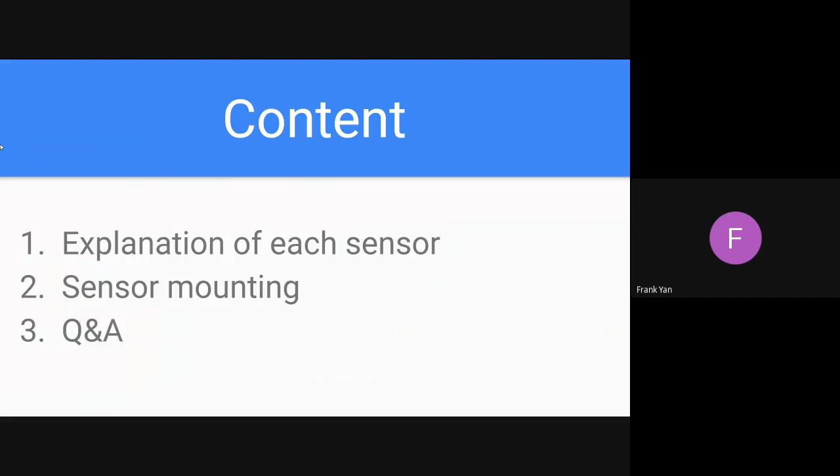Here's a high-level overview of the sensors we have for our autonomous vehicle. At the very front of our car, we have two radars, mounted on the front bumper, as you can see in the side view and front view. Near the roof of the car, we have 3 cameras in total. The middle one is a special camera that uses a fisheye lens, while the other 2 cameras use regular lenses for performance things such as object classification.

Finally, the sensor in the middle of the roof is the LiDAR. From the front and side views, you can see the LiDAR is mounted a bit higher than the other sensors, including the cameras. Arhindu will talk more about why we have the LiDAR higher, but this is the high-level overview of our sensor configuration.

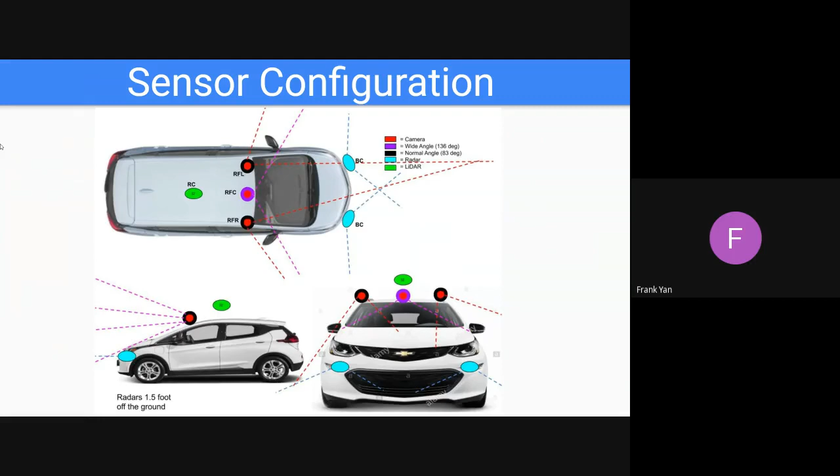So let's start out with the first sensor, the LiDAR. What is a LiDAR exactly? It's known as light detection and ranging. It's essentially a remote sensing method that uses light in the form of pulsed lasers to measure ranges to the Earth.

The LiDAR has terrestrial, airborne, and mobile applications. How the LiDAR actually works is that inside the LiDAR there's a rotating mirror where the light beam will bounce off of. Once that light beam hits that rotating mirror, that pulse is going to bounce off surrounding objects and return to the sensor. That sensor is then going to use the time it takes for each pulse to return to calculate the distance it travels.

Another way that the LiDAR can be commonly configured is that you just have everything rotate inside the LiDAR. But for most cases, you generally will have a rotating mirror and you have a light beam that bounces off that rotating mirror, and you're able to collect information from your environment.

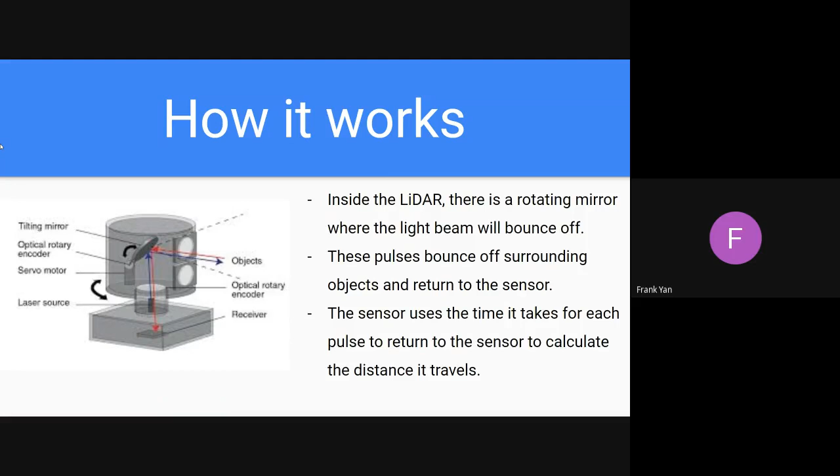The reason why we use a LiDAR is because it acts kind of like the eyes of our autonomous vehicle. As the LiDAR system is sending out millions and thousands of lasers every second, an onboard computer can record the laser's reflection point, and you're able to recreate a 3D representation of your environment as shown in the picture on the right. You can use this 3D representation to determine the vehicle's position with other surrounding objects.

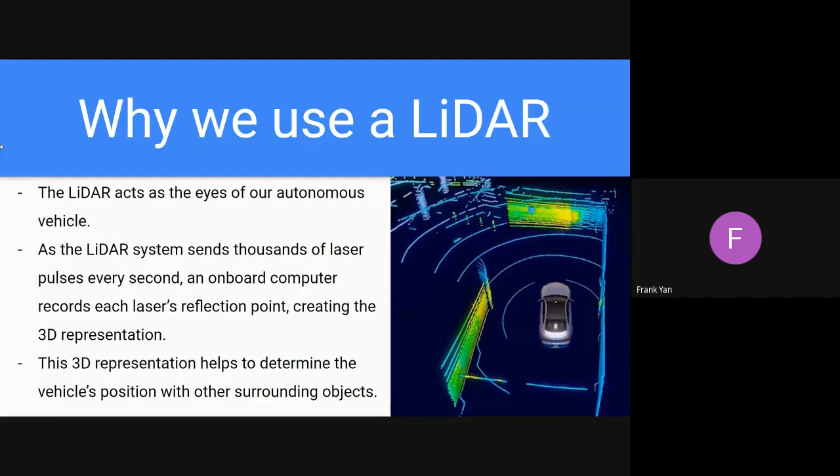So you're able to get a 3D environment, but you're also able to extract key information such as the length, height, width of certain objects. It really makes it easy to get a better sense of your object and the environments that your car is going to be in.

The specific model that we use for the LiDAR is the VLP-32C LiDAR. The reason why we chose this model is because it has a 360-degree field of view, and has the best vertical resolution compared to other LiDARs, and there's great power and temperature efficiency, which makes it easy to maintain. It also has a very high point cloud density, so it's able to contract all this information, and you're really able to get more accuracy from your point cloud.

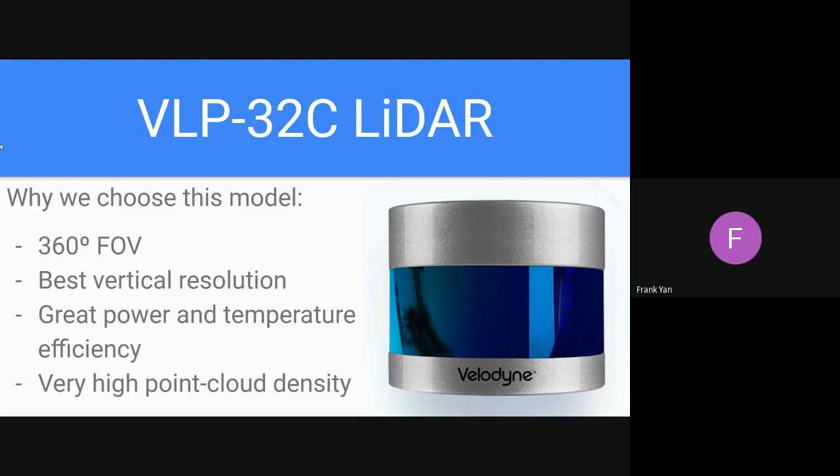So there are some pros and cons to the LiDAR. The pro is that data is going to be collected very quickly, and you're able to retain high accuracy with your data. This means you have a lot of high sample density within your data, and you're able to get key information such as the XYZ coordinates of a certain object and even more information from your environment.

It's also capable of collecting data from elevated surfaces and works in bright and dark environments. So if you're driving at night or going up a hill, the LiDAR is still able to retain this information rather well. The LiDAR also really helps in detecting weird objects, as there are no geometric distortions when it's collecting this information. Because it's a light beam, it's a lot easier to pick up on these weirdly shaped objects, and that's what really makes the LiDAR really powerful.

However, there are some cons for the LiDAR. It's very expensive - the model we discussed, the VLP-32C, costs around $10,000 Canadian. It's also very ineffective in heavy rain and low-hanging clouds. If you notice, a lot of these autonomous vehicles that you see in public are in California or really nice places with good weather, because the LiDAR is able to excel in those weather conditions. But if you take it to Canada, the LiDAR is not going to do so well with lots of snow and heavy rain.

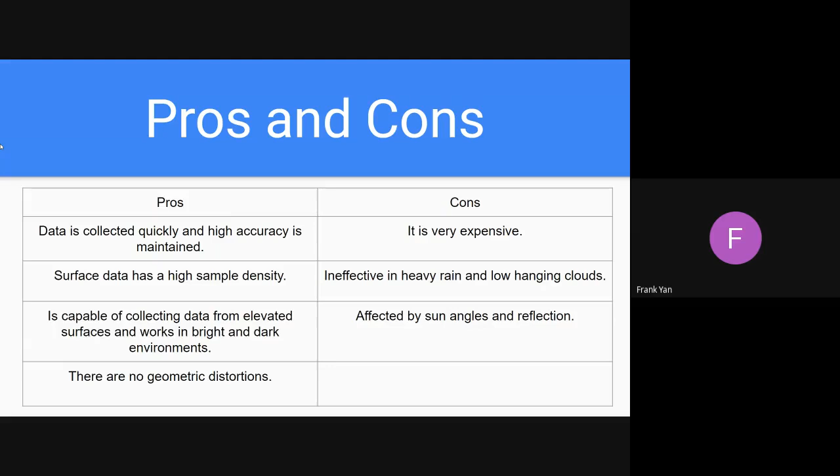The reason why that happens is because, one, it will get damaged by rain, snow, etc. And two, when you have light going with water, the water can refract that light, so you're not able to get 100% accuracy as you would in sunny conditions. And even though the LiDAR does work well in bright environments, it's still affected by sun angles and reflection. If you're going down a city and there's a large glass building on a sunny day, it's going to be harder for the LiDAR to extract that information, because if there are a lot of reflective surfaces, the light may not bounce back correctly or accurately. So it definitely does get affected by sun angles and reflection.

So the next sensor that we're going to cover is the radar, and I'll be handing this over to our radar driver manager, Gokul.

First we'll go over the high level principles of how a radar operates. Basically, it emits radio waves from a transmitter, and then it measures the echo off of objects of interest.

Based on that, we're able to derive useful information like the position and velocity of those objects. For example, to get the velocity from a radar, it's calculated by observing the change in frequency from when we emit those waves and when we read the reflected waves again.

So we could tell if an object is moving away if the waves have stretched, meaning the frequency has decreased, and if the object is moving towards us, the waves will have compressed, so the frequency has increased. This is known as the Doppler effect.

And in terms of position, we just use the time delay between transmission and receiving that reflection.

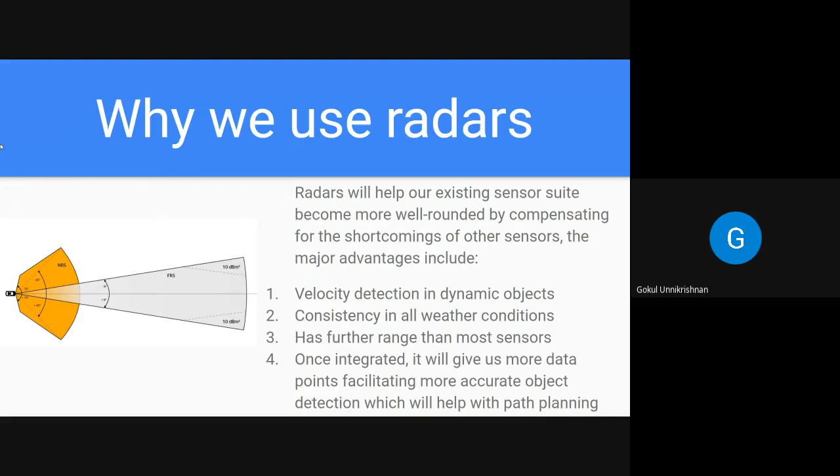So the model that we're using is called the ARS430 from Continental.

We chose this model because it has a long range from 0 to 250 meters, and it can perform a couple of types of scans, the near scan and the far scan.

The near scan has a field of view of plus minus 75 degrees and a distance of 70 meters. The far scan has a field of view of plus minus about 9 degrees, and it can measure up to 250 meters away.

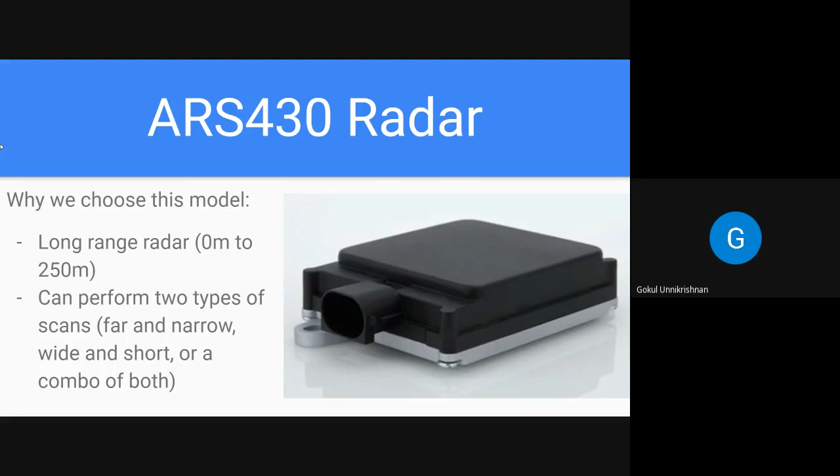The video on the left is the point cloud data that we display on the RViz module that I talked about earlier. In the bay, there's a table, we have two radars there, and people will just be walking across, and you see those detections in the video.

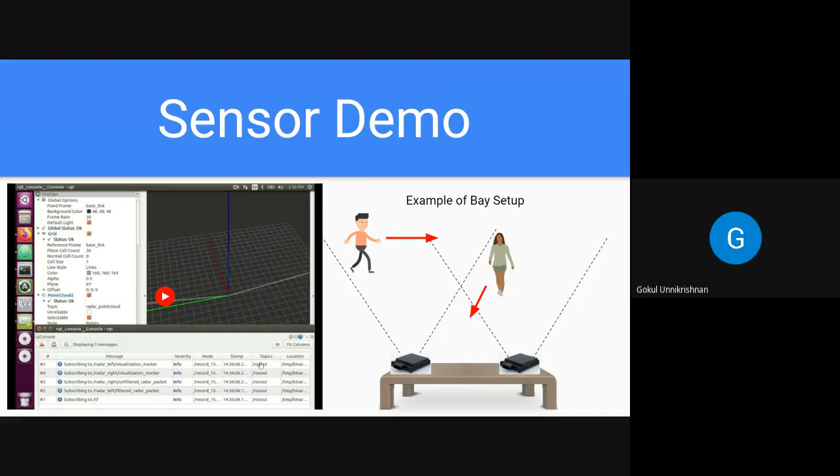We don't have to play the whole thing, but basically the green detections are from the left radar, and the blue one is from the right radar. There's info at the bottom, basically indicating that something was detected.

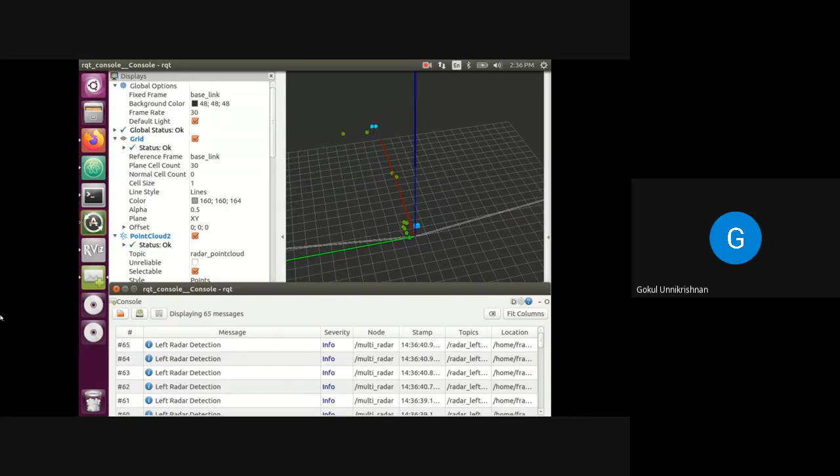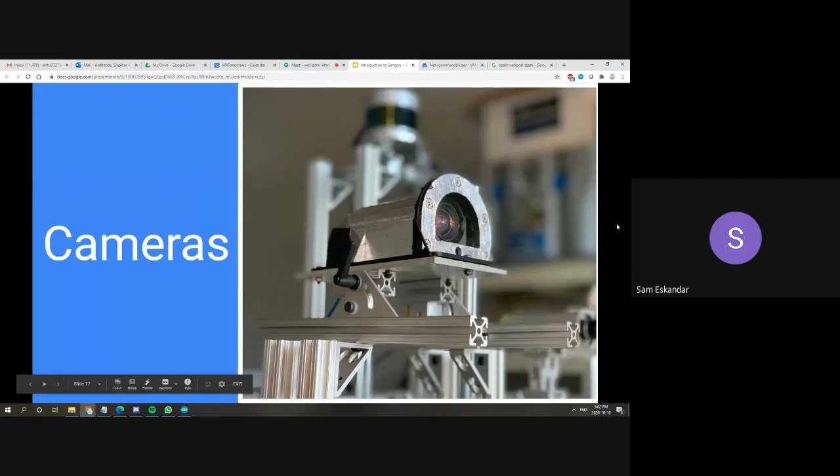All right, so it's time to learn about cameras. Okay, let's get into it.

Cameras in autonomous vehicles are used for capturing long-range, high-resolution information. It's literally just a camera taking pictures. Two parallel cameras can assist in developing a 3D mapping. Most of the time, cameras are used for capturing 2D information, such as lane markings or sign information. However, using multiple cameras can allow for a 3D model of an image that is detected. So just think of it as both your eyes working in tandem to give you something like depth perception, or show you the things in front of you.

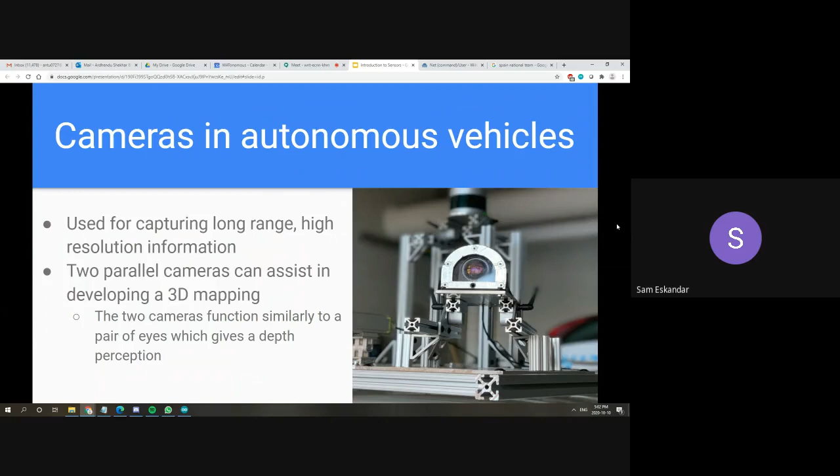So why do we use cameras? Other sensors can be limited in range, such as LiDARs and radars, and they will tell you your surrounding objects. However, cameras can tell you something coming from a far distance, like an upcoming traffic light or stop sign. 2D objects need to be captured. Lane markings and sign information are important, whether the lane marking is a yellow line or a white line, or the sign is yield or stop. These are important distinctions that we have to make. And then distinguishing different objects.

So looking now at the cameras we use, or some models that we use. One of the lenses here is the Fujinon DF6HA-1B lens. This lens has good stability. Cars are obviously moving objects, and just because the car is moving, we can't sacrifice the quality of the image, or else we won't be able to tell what we're actually taking a picture of. So this lens provides good stability when it comes to that, and has a resolution of 1.5 megapixels.

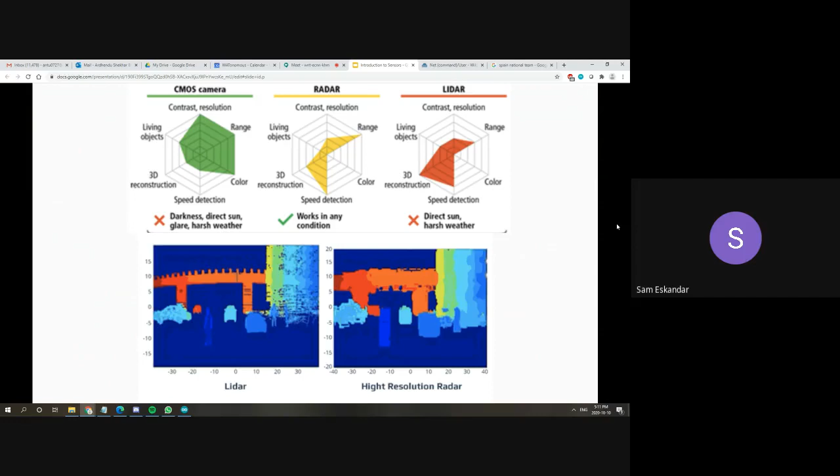Now IMUs, let's get into it. IMUs are inertial measurement units, used to track vehicle position and orientation. They come with a combination of different sensors within them — it's one sensor, but they have multiple inside: three main sensors, accelerometers, gyroscopes, and magnetometers.

Not all IMUs have magnetometers — if it's not essential, you could still have a true IMU without it. All a magnetometer does is add an extra 3 degrees of freedom. Every single one of these sensors provides 3 degrees of freedom, essentially X, Y, Z.

The accelerometer measures movement in the X, Y, and Z axes, telling you how fast you're ascending and descending and how fast you're going in general. The gyroscope tells you pitch, roll, and yaw — your orientation relative to the center of the Earth. Magnetometers measure your orientation to magnetic north on the X, Y, and Z axes, telling you which cardinal direction you're facing and which angle you're leaning. So that's 9 degrees of freedom total, each sensor providing 3.

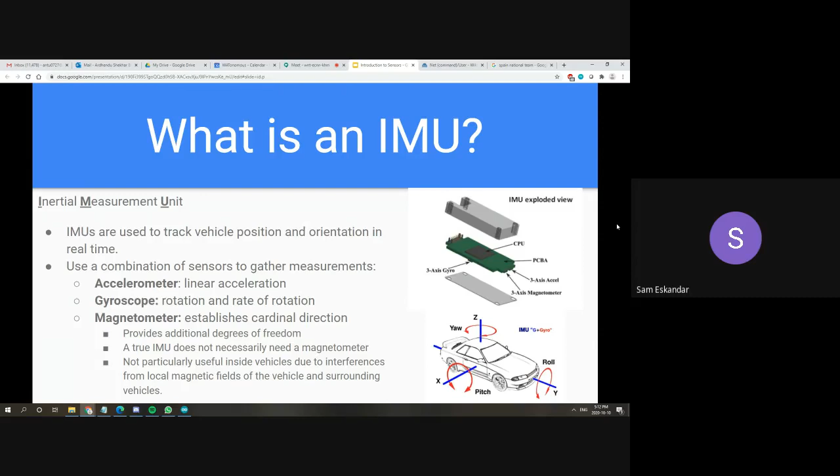As I was saying before, a typical IMU has one of each sensor per axis, which is why each one comes with 3 degrees of freedom. So generally they only have 6 degrees of freedom, and 9 if a magnetometer is added.

So they work by, the data reported by the IMU is fed into a processor, which determines the angular velocity by integrating to find angular position. Then based off the inertial reference frame, we take measurements and run them through an algorithm, some software we have.

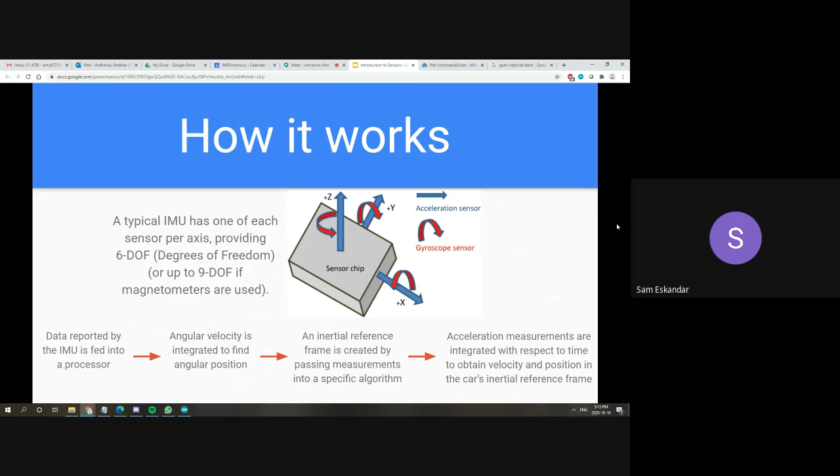And then the acceleration measurements are integrated with respect to time to obtain velocity and position in the car's inertial reference frame. This is how we determine things like how fast we're moving, or the position. So math is useful, look at that.

So why do we use an IMU? IMUs provide localization data, and they serve as a supplement to GPS positioning systems. This is actually useful for the Year 4 competition, applicable to autonomous driving, because one of the challenges is we're going under a tunnel.

How are we going to drive the car, or how are we going to direct the car? Because we don't have any GPS signal anymore, and that's where the IMU comes in.

IMUs work in tandem with multiple different sensors. They're not always just on their own, usually working with GPSs. The IMU we have, as well as the GPS, are both provided by Novatel, just for some background.

So this will be important coming to the next slide where we talk about some of the disadvantages IMUs come with.

IMUs tend to accumulate error because of dead reckoning. Dead reckoning is when small measurement errors that we take at the start, or at a point in time, will accumulate and lead to drift.

This is essentially like if you're doing a math problem and you're rounding at the very start, and then you get to the end and your answer is off by either a whole number or some decimal points, because you're rounding. Same concept here.

It's using previous measurements, although it's supposed to be provided in real time, and using those calculations skews the actual values. This can be corrected by having defined limits, where once we reach a certain point, we have to correct our errors.

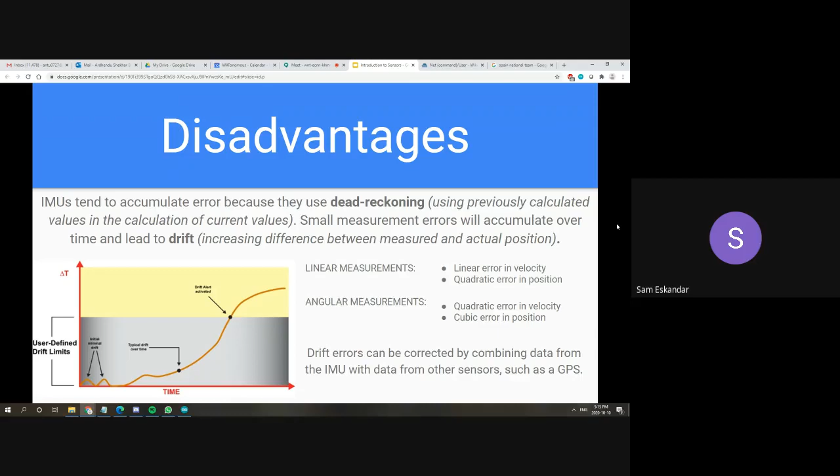So I'm going to start talking about the sensor mounting and the basic design methodology that we go through while mounting the sensors and actually designing enclosures for them.

So usually for any given sensor, our design scope can be divided into two broad categories: mounting and enclosure. The mounting deals with how the camera actually sits on the car's roof rack.

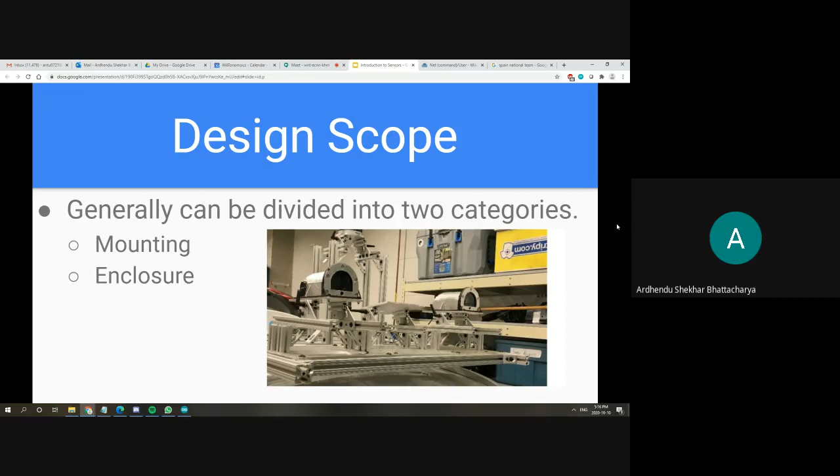So in design requirements for mounting, one of the main ones is stability, and a lot of it deals with vibration resistance. We want to make sure that when the car is traveling, the sensors don't vibrate and the mounting is as stable as possible.

Not only does instability induce a risk of the sensor quite literally falling off the car, but it also hinders the sensor's ability to take accurate measurements.

Furthermore, we also want the mounting design to be as simple as possible. So in the case that we want to unmount a sensor for some reason, we want the design to be as simple as possible so that can be done quickly without any hassle.

For the enclosure, we want it to be durable because we want it to be able to deal with the elements of nature. For example, in our case, since we're in Canada, a lot of it would be snow and rain.

It'd also be dust, and we want to make sure the enclosure can deal with it. Apart from that, it has to provide appropriate insulation. So even if it's durable, we need to make sure the enclosure actually does its job and doesn't let any of these elements of nature affect the actual sensor itself.

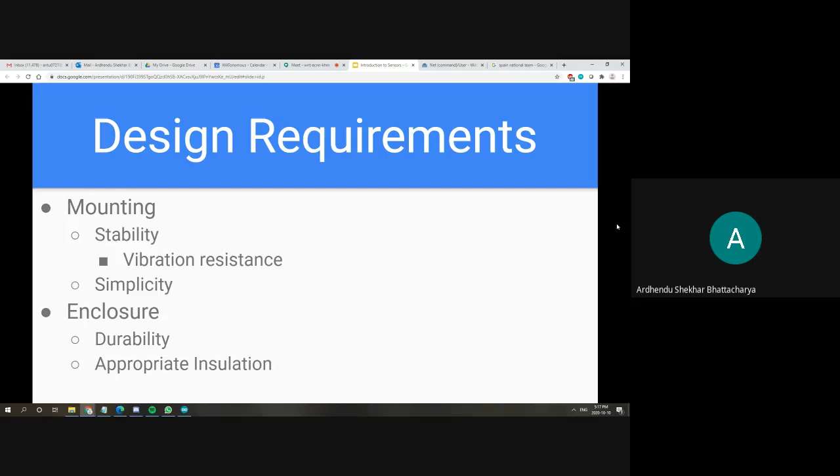So the design verification for the sensor mounting is done through various methods. The two most common ones are finite element analysis simulation and hand calculations. Usually these are done in conjunction. So we use hand calculations to see what we should expect and see what the design should behave like, and we use the simulation to actually verify that what we're expecting is what's going to happen.

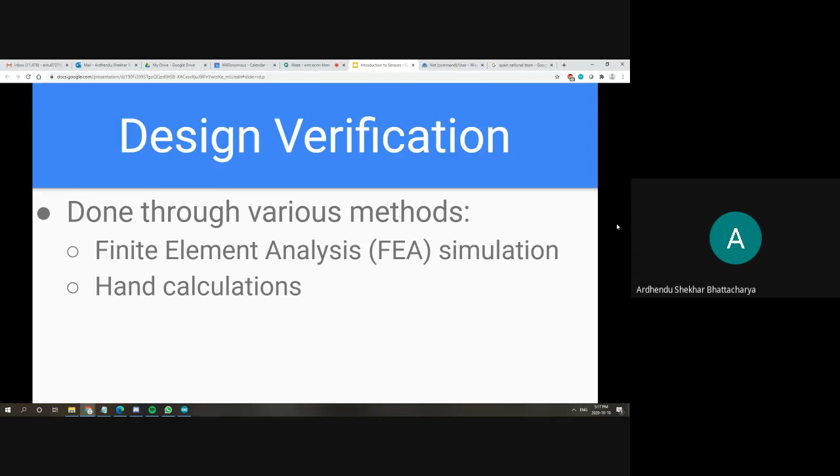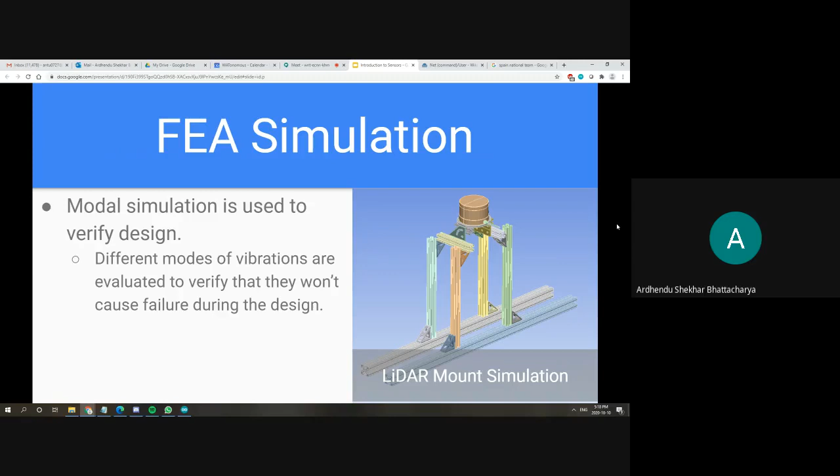So in modal simulation, there are four major steps. The first one being defining the materials. That's just taking all the parts and saying what material they are, because based on the material properties, they will have different degrees of susceptibility to different forces.

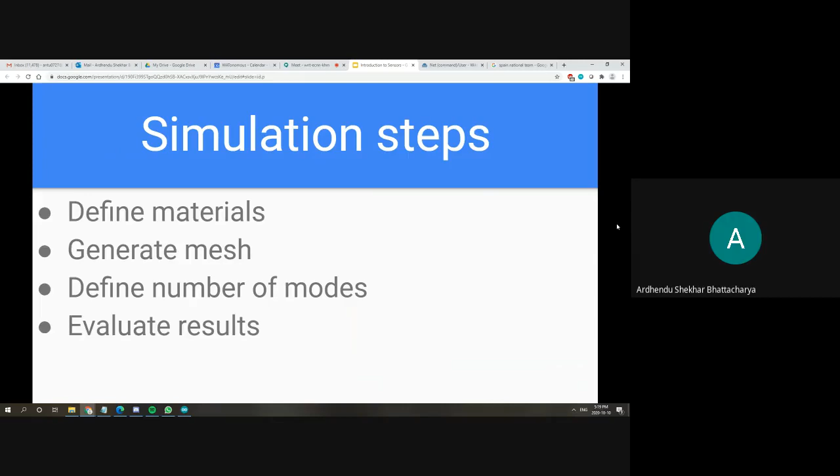The next step is to generate a mesh. So that's dividing the entire system into very small elements. The third step is defining the number of modes. That's a matter of just seeing how many different kinds of vibrations we want to evaluate for failure. And the last one is actually evaluating the results ourselves based on what the simulation spits out.

So mesh generation, as I mentioned before, is essentially done to divide the structure into very, very small pieces. What the simulation does is it analyzes each element on its own, and the final result is a superposition of all the finite elements that are generated by the mesh.

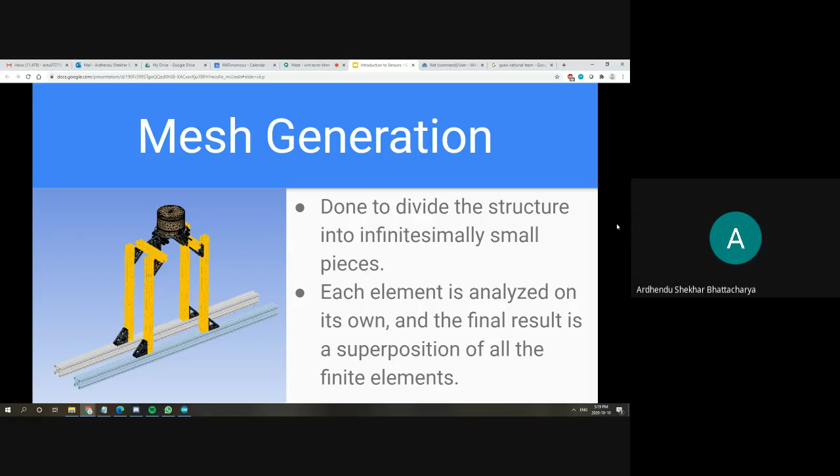So just to give a brief background on vibration modes, a mode of vibration is simply a unique manner of vibration that the system can experience. For example, one mode of vibration could be a beam going up and down, while another mode could be a beam going left and right. Each mode is caused by a unique combination of forces and conditions, and because of that, some modes are more probable than others. It's up to us to determine which modes are the most probable and to evaluate them accordingly.

Additionally, each mode has a natural frequency associated with it. The natural frequency is the frequency at which the vibration occurs for that mode. The entire goal is to make sure that our design avoids resonance at this frequency. What that means is the frequency that, for example, the car is traveling at should not be close to the natural frequency, because that's where resonance occurs and that's where failure is most probable.

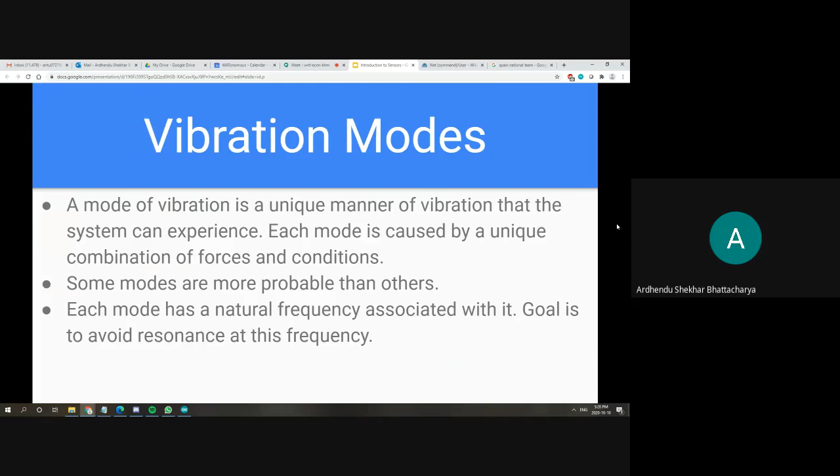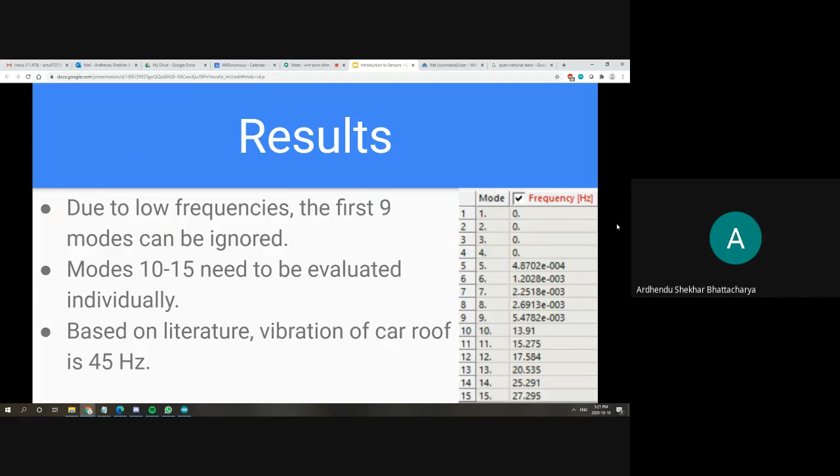So if you look at the table, we can see that while none of the frequencies come close to 45 hertz, the closest one is mode 15, and we need to evaluate modes 15, 14, and 13 especially critically to make sure they won't result in resonance. So now I'm going to walk through each of modes 10 to 15 and go through a simple evaluation of each mode. So this is mode 10.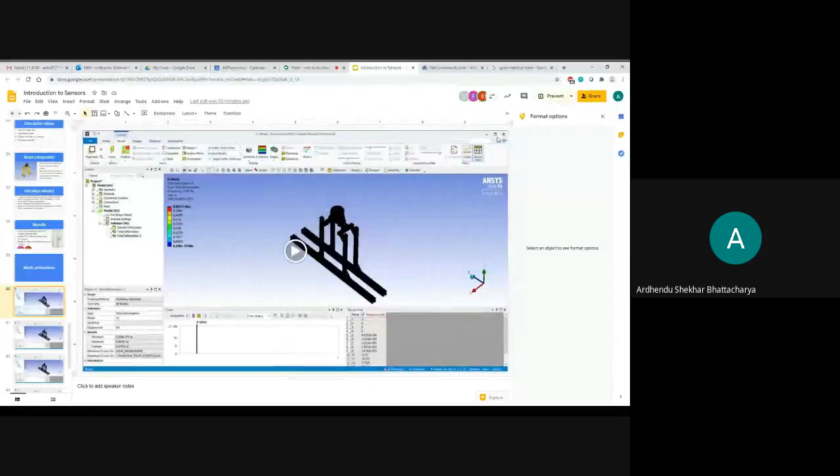Yep. So as you can see in this mode, what the simulation is basically saying is the LiDAR will kind of rotate along the horizontal, or the XZ plane in this case. So I'm going to reference this coordinate system here. So essentially rotating about the Y-axis on the XZ plane. And we can see in the table that the frequency is 13.91 hertz.

So based on the literature value, this will not cause resonance, but at the same time, we know that this is not very probable, because at the side of these two beams are two long extrusions that are running across the roof of the car, and due to that design, this mode of vibration is not probable in the first place. So this mode can be safely ignored.

So then this is mode 11. And as you can see, this is kind of just rocking, and it's vibrating around the x-axis this time. And again, this is not very probable, because that would quite literally mean the roof rack is going up and down, and that's a very improbable case. Regardless, we can see that the frequency is low, so this mode can also be safely ignored.

So then this would be mode 12. And this one is a very similar mode of vibration, except this time it's rotating along the z-axis. Once again, not very probable, so we can safely ignore it.

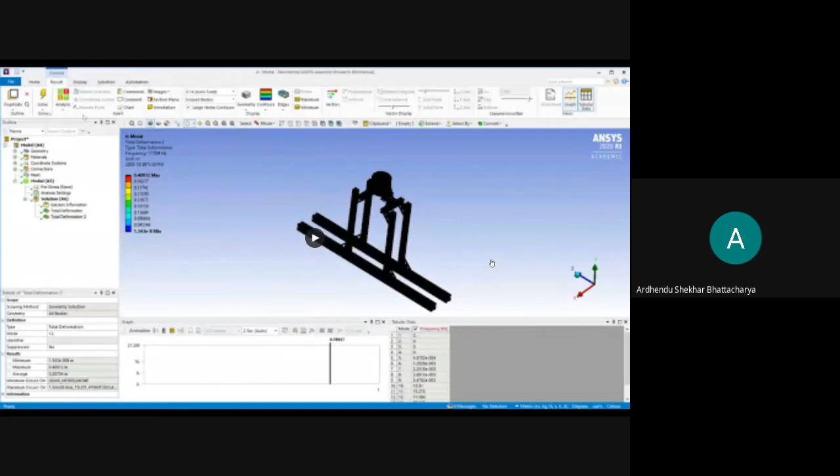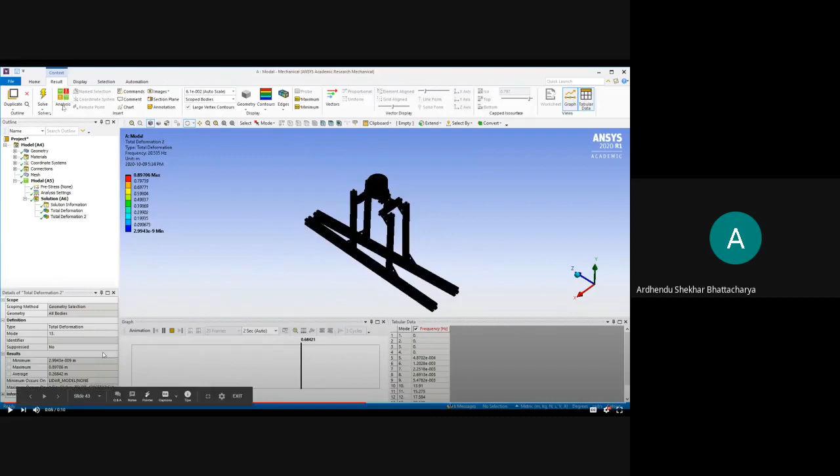Now this one is a more probable mode of vibration, because this could occur due to one of the bolts kind of coming off or becoming loose, causing these horizontal structures to start to rotate and bend and vibrate. And this is mode 13, and this has a natural frequency of approximately 20 hertz.

So while this is a probable mode of vibration, when we compare it to our frequency of 45 hertz, we can see that it won't cause resonance. So then this design passes that mode as well.

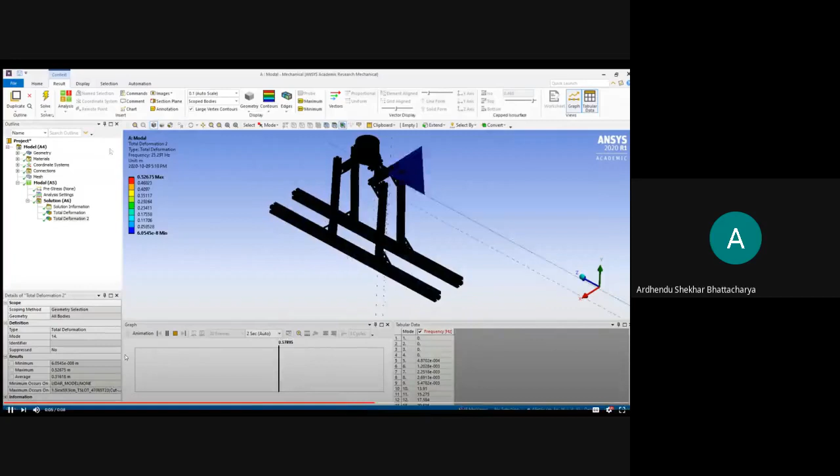And mode 14, while it's still somewhat probable, where the bolts come out, it's again still very improbable. And even then, from the frequency table, we know that there's going to be no resonance, so we can also ignore this mode.

And lastly, mode 15. This one, once again, extremely improbable, where it looks like the LiDAR is walking. And even though this mode had the highest natural frequency, we can safely ignore it because this mode is very improbable as well.

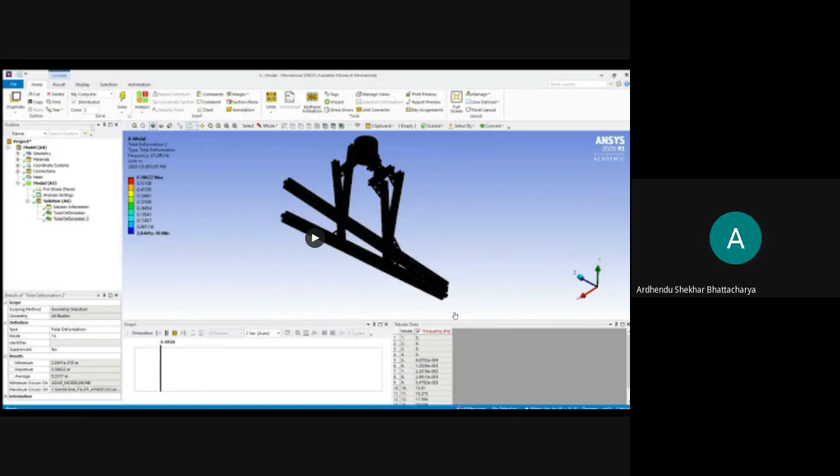So therefore, based on that analysis of these 15 modes, we can safely say that this design passes the FEA verification, and it won't cause any issues, at least from a vibration perspective. And yeah, if you guys have any questions regarding the entire presentation, feel free to ask us now.

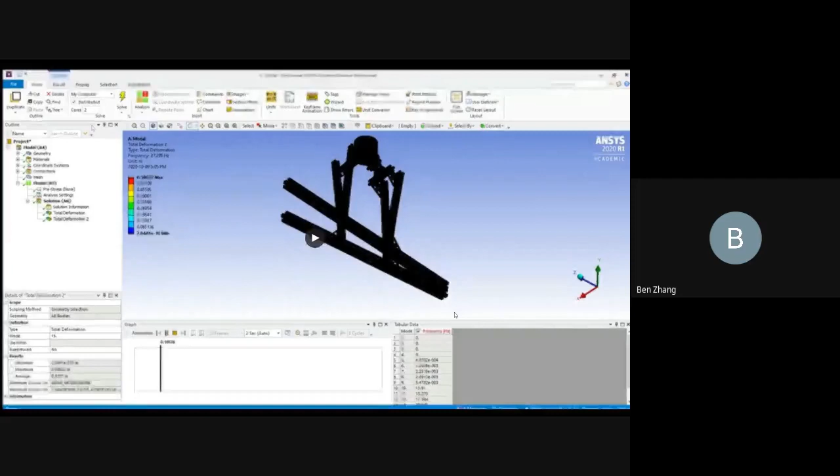Hi, this is Ben. A great presentation. I had a question about the last part where you talked about resonance. What happens when there's resonance? So resonance essentially means two waves superimpose each other, and because they have the same frequency, if they're in phase with each other, that would cause the effects to amplify, or double assuming they have the same amplitude, but usually it means it's amplified, and that's the worst case scenario.

I see. And this will cause vibration, which would disturb the sensor data. Yeah. Okay, makes sense.

Hey, it's Charles. I have a question as well. Again, great presentation. I really enjoyed it. So for the vibration modeling, how do you ensure that your model is going to accurately reflect how the roof rack behaves in real life? Surely the specific bolts or the torque values that you use for your bolts will affect the behavior.

Yeah. So part of it is just making sure that the pre-processed values that we use, for example, the system that we analyze and the design variables that we put in, are as close to reality as possible. But also, that's why hand calculations are so important, used in conjunction with simulation, because oftentimes simulation makes assumptions and those assumptions don't hold true in real life. So it's usually bad practice to look at the numbers from the simulation itself.

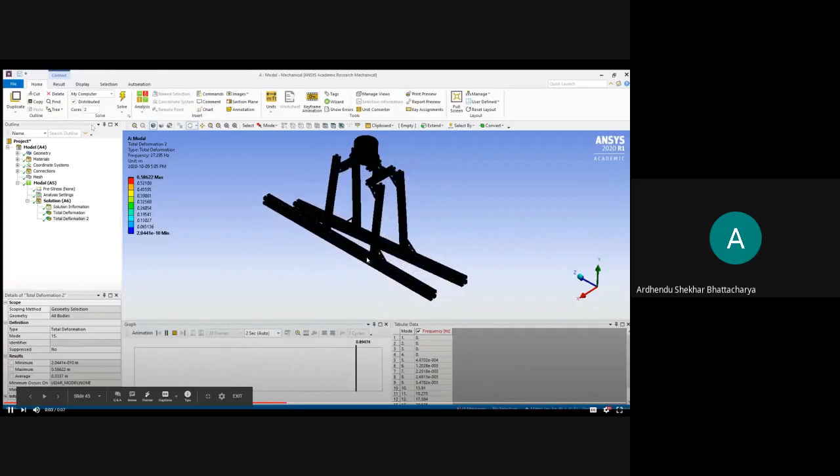So a mode is simply one of the manners or ways the thing could vibrate. For example, mode 15, if this mode were to occur, it would vibrate like this, or if you look at mode 14, it would vibrate like that. The generation of the modes is done by the simulation software itself. So in this case, it's ANSYS.

So in ANSYS, the first 6 modes are always there by default, and those are called rigid body modes. They tend to have the lowest frequencies because they assume that the system is completely fixed, or sorry, the system is completely free.

It doesn't show it here, but if we were to go to the solution tab, you can select how many modes you want to identify, and the software simply chooses. So if, let's say, I chose 20 modes, it'll choose the 20 most probable modes of vibration based on all the system values that I've already put into it.

Very cool. Just to clarify the visualization here, that's an exaggeration, right? The amplitude. Yeah, that's definitely an exaggeration. You can't see it clearly from the picture, but if you were to zoom in, you could see this, and the highest it goes to is 0.52673,

and that red, when we looked at it, there wasn't anything in the spectrum. It was usually here, where it's very low, usually in this range, from 6.05 times 10 to the power -8 to 0.12 meters. Oh, sorry, what are those numbers? That's the total deformation, so that's actually how much it deforms by. Deformation is essentially a measure of how much it changes shape.

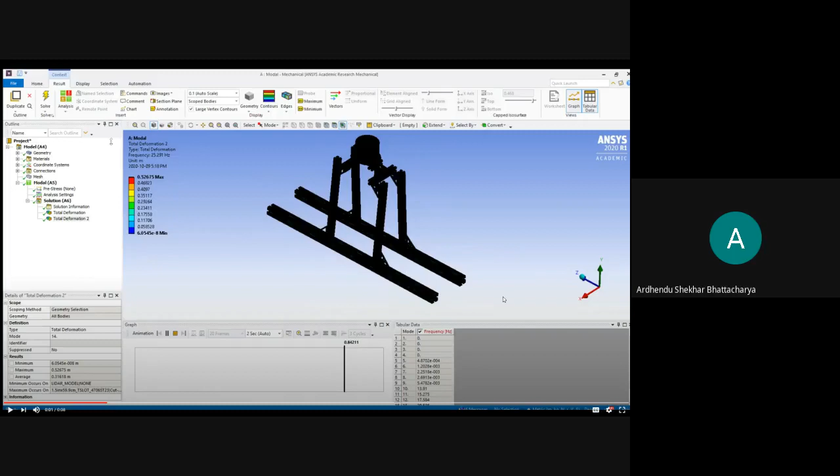Hi, this is Jacob. I was wondering if you guys could talk about your signal processing stack. I think you mentioned that you're building this off of ROS. It sounded like the multi-radar is in development right now. Maybe you could talk about how that's going and what your plan is for that.

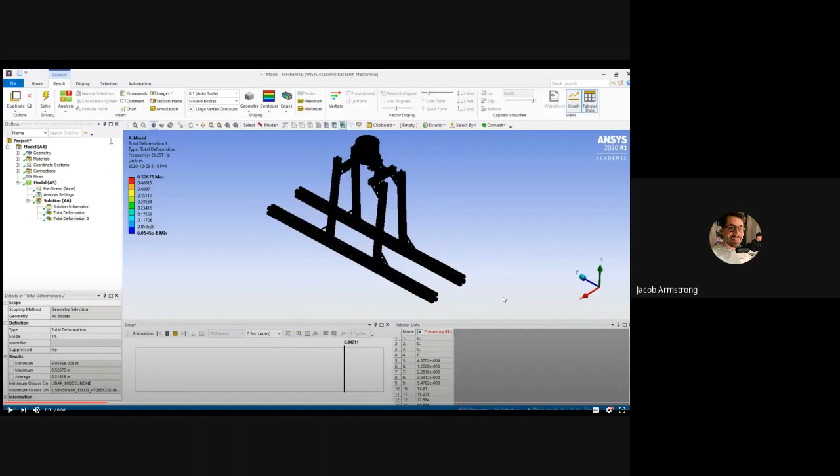Sure. So we are using ROS as our framework for the sensors, and we're actually using ROS for a lot of other things. The multi-radar is in development because we encountered issues with getting duplicate points, but then we found out it was inevitable, just because we have those two radars close together. They're just going to generate noise with each other.

So right now, what the radar team is going to be working on is object tracking. We're going to be figuring out how to cluster our point cloud data and send that over to our perception team to use for object tracking.

Yeah, a big project we have is basically sensor fusion. So we have all these different sensors between the cameras, LiDARs, and radars. But the path planning group, when you're driving a car, doesn't want to know this data is from the radar or this data is from the LiDAR. You want it all in one unified package, one unified frame, so you can make decisions in a simplified way. Frank was talking about sending stuff to our object tracker, and that's something we'll probably talk about at our next tech talk in two weeks about our object tracking and perception stacks. But that's where our sensor fusion happens, where we get information from all three of our sensors, our cameras, LiDARs, and radars, and turn those into unified bounding boxes with a classification label.